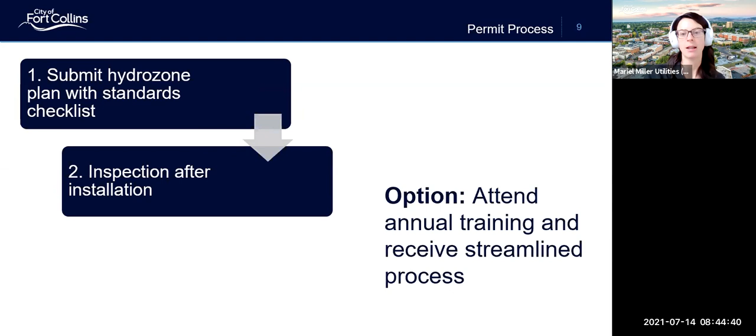And we are playing around with this option of attending an annual training. If a certain irrigation company or group who's doing the installation were to attend the annual training, they would receive a streamlined process. And we don't really know those details yet, but that's one option we're playing around with. I think that's my last slide, and I'm going to turn it over to my colleague Eric Olson, who is going to give you some more details on what these proposed standards look like. Thank you, Mariel.

And first and foremost, I do want to thank Mariel. I want to thank Rich. I want to thank Pete, everybody that's assisted in this process. This is a very lengthy process that we're trying to get through, and a lot of details that really complement it. Help me out in the long run. So I can't thank the support of the people that we have and the colleagues that I work with every day. So I just can't thank you guys enough.

Now back to the landscapers and the irrigation professionals and the irrigation designers we have online. This is a great opportunity for all of you involved to be part of our residential irrigation codes as we move forward. I can't stress the importance and just how much I appreciate your attendance here today, because without your feedback, we might miss a couple details that might be pretty important.

So hopefully as we go along into the irrigation design, irrigation materials, and the irrigation controls, you'll start to see where we're going and what we're trying to do, and how we're trying to create these standards to support our future. Living in the state of Colorado, we are water stewards. We have, I think, 8 states relying on the water that comes down from our mountains. And that means that we have responsibilities, and that's part of what this is.

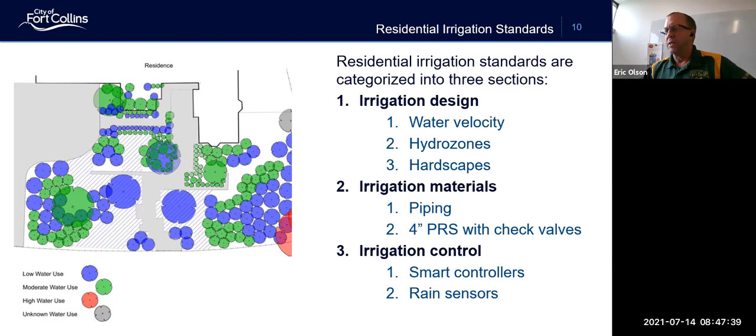And then the third section, short and sweet, is the irrigation control. And that's going to be smart controllers, of course, rain sensors, silicone-filled wire nuts, believe it or not, to be put in the ground. We really want to see the consumers protected with a sound irrigation system that's going to last and be efficient into the future.

So irrigation design, I'm not going to read these word for word, but we want to see an irrigation plan. It can be a very simple irrigation plan with a north arrow and an irrigation legend. That's really all we want to see. We want to see where the point of connection is, where the backflow sits, where the valve locations are plotted out. That's really all the irrigation plan needs to carry on it.

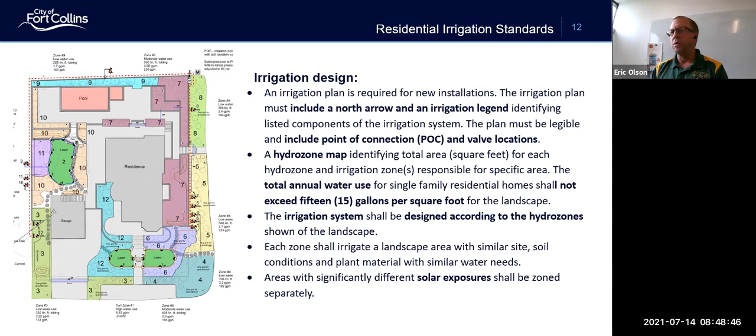A hydrozone map is really important. We all know about hydrozones. Specific water needs per the area. We also want to try to figure out what the total annual water use is for this project, for this lot. If you know the commercial code, we allow 15 gallons per square foot, and that's across the entire site. So you can have your Kentucky bluegrass, but you're going to have some low water plants in order to balance that all off. But it seems to work very well in the commercial world, so I think it's very applicable in the residential world. And so we want to pay attention to those hydrozones.

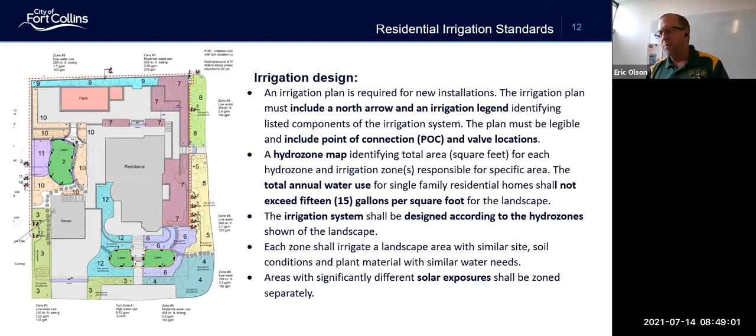We want to make sure that the landscape area soil conditions are being amended, that our solar exposures to the zones are done separately. Everything is detailed, kind of what you guys do already. And that's really important. So the next one, water velocity. Of course, this is a standard thing in irrigation design. We don't want to see the water velocity exceed 5 feet per second.

Here's one that I've put into here, and I've heard positive and negative on it, and that's a master valve. Master valves are very, very crucial and a very key element in the commercial world because we have lengthy main lines that tend to travel across parking lots into islands and thereabouts.

And the residential world, are we considering a master valve for that? I put it in here and I'd love some feedback on that. More about the design, main lines and valve boxes.

Can't tell you how many times I've seen a main line a couple of feet away from the foundation of the home break, end up flooding the basement. If it would have just been a couple feet buffer away from that foundation, probably wouldn't have had that issue or that problem. So that's one thing I think we're addressing in there.

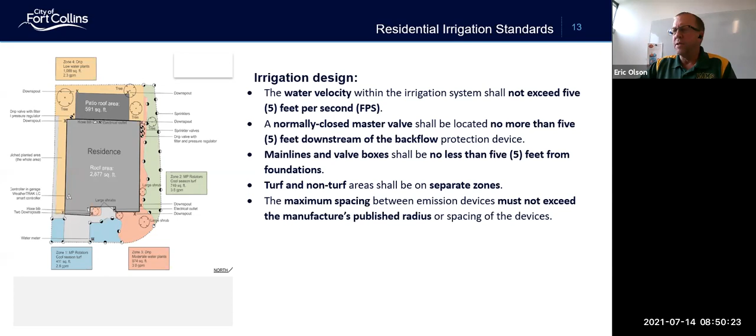Of course, turf and non-turf areas need to be on separate zones. We don't want to see any spacing done beyond what the manufacturer publishes in their books. So that's irrigation design. Moving into irrigation materials, more irrigation design.

Sprinkler heads shall be installed no less than 3 inches from sidewalks, driveways, hardscapes, and edging. This is something that I've just learned after years and years of irrigation maintenance, how affected those heads can be from, say, a drip bed, or say a rock bed with the edging leaning right onto that head. Now that head has to be moved. That head's not going to effectively cover the area. The coverage will be compromised.

One thing also to consider there is to understand that we want to see drips done separately, drips by themselves, micro sprays by themselves, or if you're trying to use, say, a rotary zone to cover some dense plant material, we'd want to see that by itself. We'd like to not have any of those combined in the same zone.

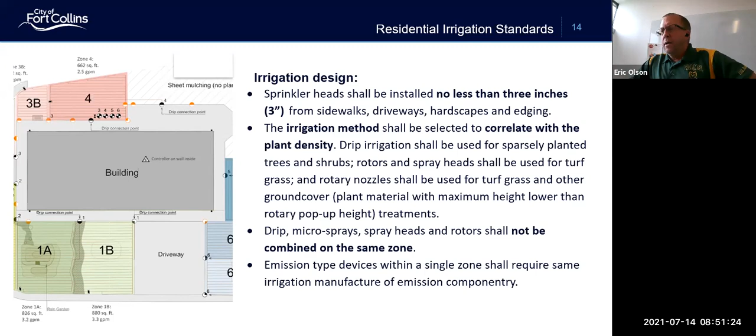All right, so we got our first design standards question coming up here for our poll. Pete? So you've got a little taste about it. What do you think the proposed irrigation design criteria standards look like so far? Do you think it'll be difficult to meet these standards? Do you think it'll be challenging, feasible, piece of cake, or not sure about that situation? So if you'd please just take a couple minutes, give us your opinion on how you see these irrigation codes affecting your business.

I think everyone has participated, Eric. Thank you, Tara. All right, it looks good here.

Looks like we've got the outlines of design. The majority says they would be feasible. A couple would be challenging. I would love to hear from those participants of what the challenging part is, maybe after or maybe in that breakout room. So please make some notes on your thoughts so that we can make sure we get your information. Scrolling down a little bit, the irrigation design, again, we see more benefits than detriments, and that's encouraging.

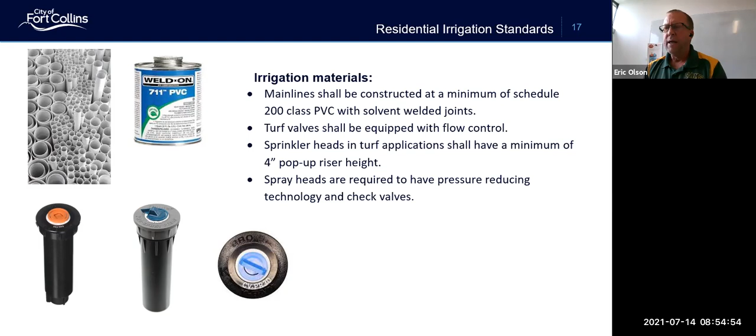And then we want to make sure, of course, since we are a WaterSense state right now, that these heads have pressure reducing technology, which is now the law. And of course, with residential, we'd like to see check valves done as well. So more on irrigation materials. As you know, in the commercial world, spray heads, we don't want to see VAN nozzles, just the standard ones when we see applications of 90, 180, and 360 degrees.

I think we've all tested vans enough with catch cans and understand that they don't perform as well as they should. They don't perform even close to what a fixed nozzle does. And so we really don't want to build a beautiful irrigation system and then foul it at the very end by putting on a nozzle that doesn't perform that well at all. Or I could just say it has one of the poorest performances of all the nozzles that we have. So we don't want to see that. That's one thing we're going to be keeping an eye on.

Pressure reduction and Y screen on all the drip zones, that's commonplace. And then pressure reducing or pressure compensating emitters. Although we have pressure reduction on the drip zone itself, we still want to see pressure compensating emitters out there just to assure that we have that consistent application of water in the drip system.

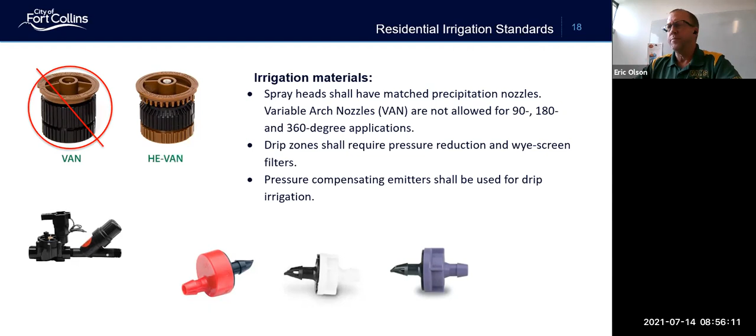All right, polling question number 2 or 3. How do you think the outline proposal of irrigation materials will affect you? Challenging, very challenging, feasible, or easy? And if you could please just take a couple minutes and give us your thoughts on this, that would be great.

So trying to get my mouse to work here, and I will move on to the next slide. There we go. And just a little bit of news. We do have some hot stuff in the hopper about how we're going to start testing irrigation controllers in the future. There's a testing center being established here in the east side of Fort Collins. I'll have more information about that.

But in the irrigation control, since this is a residential world, we do want to see WaterSense labeled smart controllers. That is how our rebate program works. We've implemented that on the commercial side as well. What we want to see on those commercial properties is a WaterSense labeled smart controller.

We want to have a functional rain sensor, and I know that's kind of a funny story, but you know, we've seen rain sensors under trees, we've seen rain sensors under the eaves of buildings. We want to actually see these rain sensors out where they're going to receive the weather and do what they should do, and that's shut the system down when there are situations of rain.

Of course, Underwriters Laboratories expectations of how we see that wire going out to the valves from the controller, and we want to see, like I said earlier, electrical splices made with waterproof and certified wire splice connections. We don't want to see an old 16-cent wire nut with a daub of 7-Eleven glue inside of there. That to me is not an electrical connection that we would support under Underwriters Laboratories. So simple stuff on irrigation control.

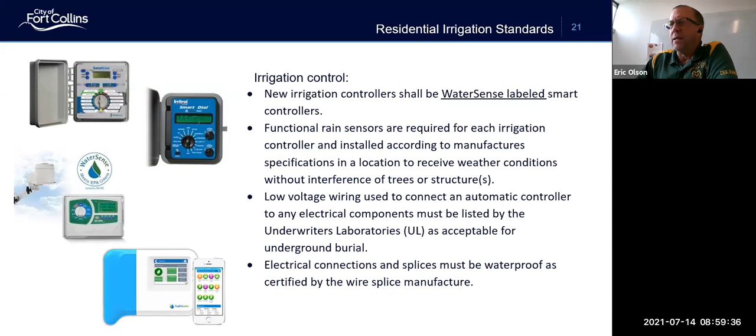If you have any ideas for some of these too, this is what we're going to do in the breakout rooms. We're going to discuss these 3 sections that we've just introduced, and hopefully you've got some comments or some actual exceptions, or some feelings that you want to interject and give us some insight on what you think about these standards. So here's polling question number 4.

The poll should be up. The poll is up. People are clicking away, so we should be good, Tara. Got 4 out of 8 so far, so somebody joined us a little late, it looks like, or who knows, somebody jumped off a little early.

Well, good. And again, don't forget that what we're trying to do is flush out information with this meeting. And so when I look down here and I see one of our participants sees some detriments more than benefits, I would love to carry that conversation on further. So shoot me an email or let's discuss this in the breakout rooms as we're ready to go into there and kind of review what we just discussed. So Tara, I think we're ready to close that poll out and move into the next slides here.

Oh, the joys, come on.